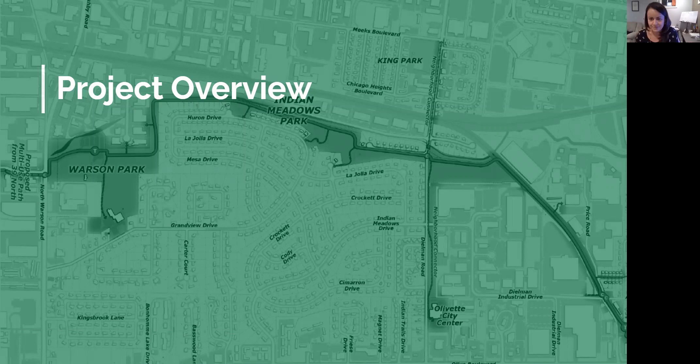Then we divide it into pieces, into segments, and we have the segment planning that started in 2018. Now we are in the segment design and site control. That's where we are right now, scheduled to be completed in this segment of the Greenway by next year, in 2021.

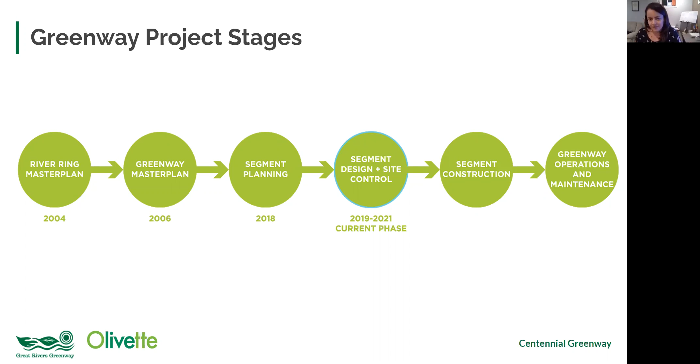After that we do the actual construction, the segment construction. And last, we have the Greenway operations and maintenance, which is when the community enjoys the Greenway, and we have good partners to help us keep up the nice feature we will be building for the community. Next slide please.

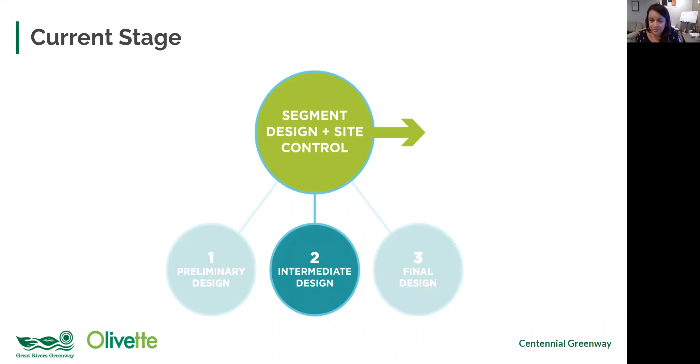So as I said, we are in the segment design and site control. We completed the preliminary design last year. Right now we are in the intermediate design, to be done and completed by January of next year. Then we will be doing the final design, to be done middle of 2021. Next slide please.

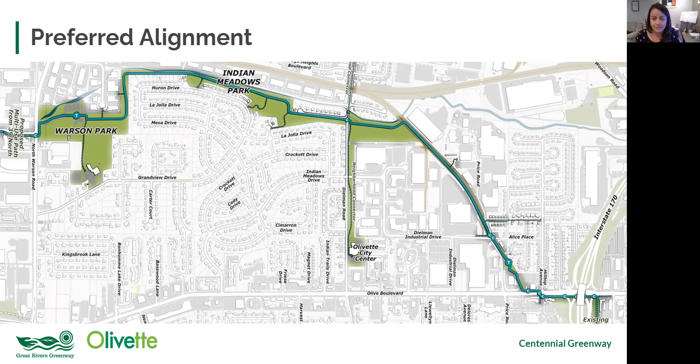So phase 1, we call it 599A—that's our internal project number—is the phase between Warson Road and Dielman Road. Then phase 2 will be the remainder of the segment between Dielman Road and Olive Boulevard. Phase 1 also includes a little portion that you'll see in the next slides, where we incorporate the Olive and 170 intersection.

So concentrating on phase 1, the design of this Greenway between Warson and Dielman Roads, and the little section at the Olive and 170 intersection, is to be complete by the summer of 2021.

Within this phase 1, we have the Warson Park project, which is led by the city at this point. They have their designer, and they are going to team up with GRG to build the Greenway within Warson Park at the same time with the same contractor. So that's part of phase one.

Then there's the Olive and 170 coordination with MODOT, the Department of Transportation. We need to talk to them about the permit to construct the Greenway through that area. It already exists, but we want to enhance the features, especially safety at the crossings there, because of what you'll hear later when Shaughnessy gives an update on community feedback. That's one of the things we need to make safety of most importance, as always.

I wanted to bring this up quickly because I've heard from some residents concerns about the Olive connection and the crossing at Hilltop. Outside of this project, the KIT development project includes the construction of the Greenway connection along the south side of Olive Boulevard, and they are increasing the size and timing of the crossing at Hilltop.

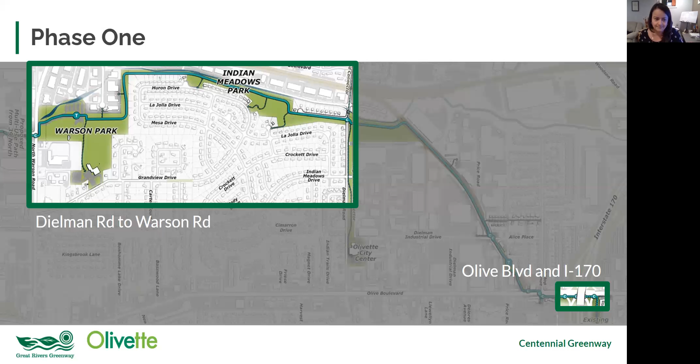Next slide please. So this one is a reminder of the section of phase one that I already mentioned, the project in Warson Park.

This other segment, again in partnership with the City of Olivette and GRG, we together submitted a request for a grant application from the Transportation Alternatives Program, the TAP grant, to cover part of the cost of construction of the Greenway between Warson Park and Dielman Road. We requested one million dollars that will partially cover the construction cost, and we will receive notification from East West Gateway on that award in early 2021.

So hopefully we get that grant, and that can help us with some of the costs to build a nice Greenway here. And at the dead end on Dielman Road, we are coordinating with St. Louis County. They have a project going on right now, also federally funded for Dielman Road, and they are incorporating the Dielman crossing of the Greenway as part of their project.

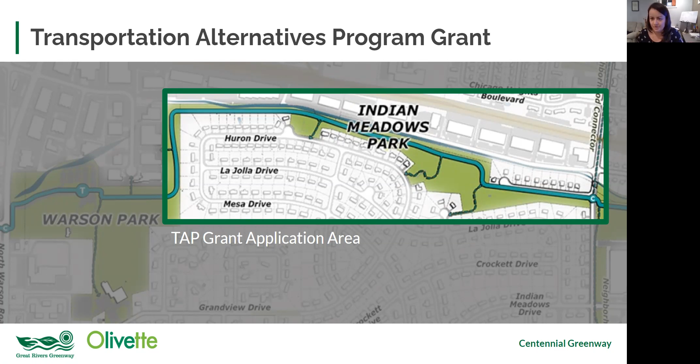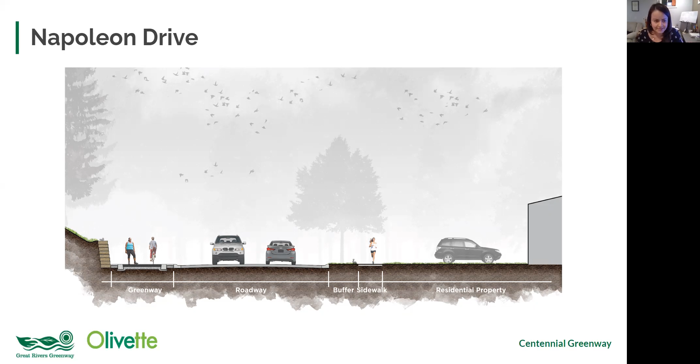So we were talking to the residents about how the construction would go, if they would like to see a privacy fence, landscape buffers, or different types of features dividing and connecting. Some residents really wanted access to the Greenway, and they wanted a gate for direct access. So that was discussed with the residents at that point. We wanted to make sure that we're in agreement with the Greenway here, and that we were listening to what they needed as part of this project. So we have retaining walls, fences, landscape buffers, and a lot of work to be done in this area. It's a challenge, but it's not impossible. So we're planning for it.

Additionally, in this area, MSD was planning to complete a sanitary relief project. They have agreed to move to the other side of the River des Peres. Later on, Bruce is going to update us on that project, but I wanted to mention it was a great benefit to work with MSD and help us not interfere or conflict with their project area. So we were able to have each project have their own project area without conflicts. That was a great accomplishment by the team.

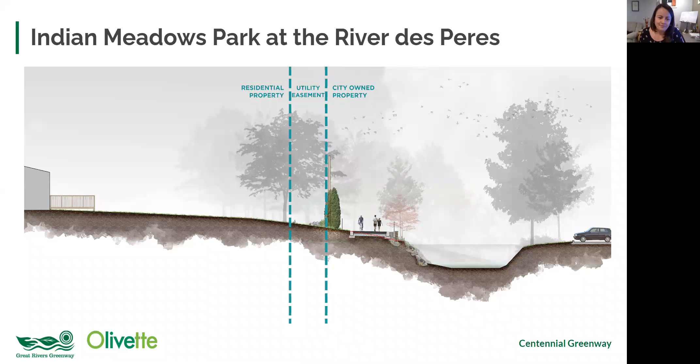Okay, next slide please. So during the intermediate design, we are continuing to work through the details of the design and adding features to make a great Greenway experience in this community. The work is being driven by feedback we have received from you, the community. And with that, I will welcome Shaughnessy Daniels, our Civic Engagement Manager, to give us an update on what we heard from the community on the online survey. Thank you, Angelica, I appreciate it.

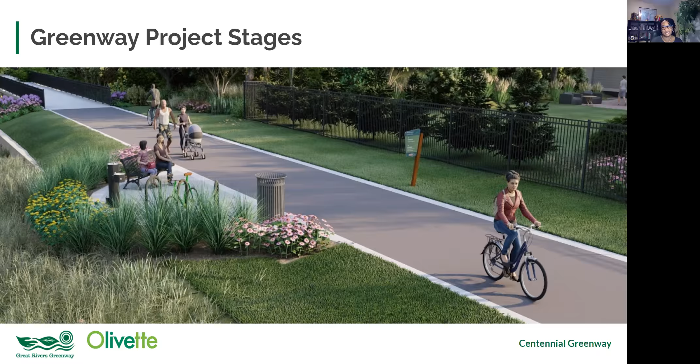I wanted to first, before we go into the actual results of the surveys, talk a little bit about engagement. Engagement is a core principle for Great Rivers Greenway. It's embedded in all of our work, and it's really important to us in terms of our planning and design work for our Greenway projects. We engage early, we engage often, and we engage throughout a project to ensure that the voice of the community is heard and really drives the design for the Greenway project.

So this project in Olivette is no different. We began engagement on the front end of this project. We started in 2018 with the alignment study, where we worked with the community to determine where the Greenway would go. The study was vetted by the community, largely driven by a community advisory committee, and presented to the city council in the spring of 2019. That's how we got to the actual alignment. Now in 2020 and 2021, the engagement is focused on design, so it's your input and ideas that are informing the plans that determine the look and feel for this Greenway. Engagement for this phase launched in June 2020.

We stutter-stepped a little bit because we were in the middle of a pandemic, but we figured out how to get out and have conversations with the community safely. So we started with stakeholder meetings, as Angelica talked about, with the neighbors whose homes are closest to the Greenway alignment. And once those conversations were complete, we provided an update at the July Coffee with the Mayor event.

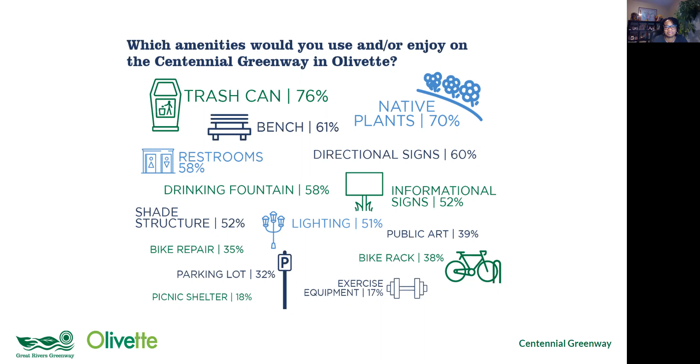We are now going to transition into what it is we're working on, things we're developing, talking about, as Shaughnessy mentioned, some of the feedback we've heard. We had a preliminary design. We're updating, adding detail, taking into account different aspects as we navigate a trail through the community. If you remember back to the overview, a majority of this phase is running through Warson Park and Indian Meadows Park, so we're working to develop alignments that blend into the park through those areas and interface with the park and the residents in a responsible manner. And then the portion along Olive at the I-170 interchange as well.

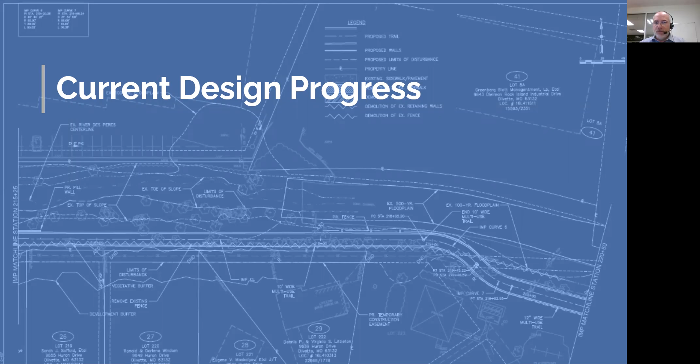So let's talk in a little more detail. As was mentioned, we're in the intermediate, I'll call it 70% design phase. We started with the conceptual study - where should the alignment go. That transitioned into a preliminary design called the 30% - detailing out where it could go. Now we're just adding more detail: how's the drainage, reviewing the proposed design against existing drainage patterns, the slopes of the ground, the roadways we're interfacing with, like Dealman Road and Olive Boulevard. Those are very important, along with park features, to really develop an idea of what the profile should look like - responsibly taking care of drainage, connectivity, and keeping the grades of the trail at walkable, comfortable slopes.

And then the other piece that we're doing, as mentioned, work along River des Peres behind the Huron properties - that's a kind of delicate area, a narrow footprint right next to a creek. We're coordinating with the Corps of Engineers on that one.

Dealman Road - coordinating with St. Louis County Highway Department, who operates and maintains Dealman Road. I-170 - coordinating with MoDOT. The MSD project was mentioned, so there are various other stakeholders that this trail will interface with, and we're taking this time to really add detail to the design and coordinate with those other agencies as the project interfaces with them. And then, all along, goes without saying, coordinating with the city of Olivette and Beverly as we're navigating a trail through the parks.

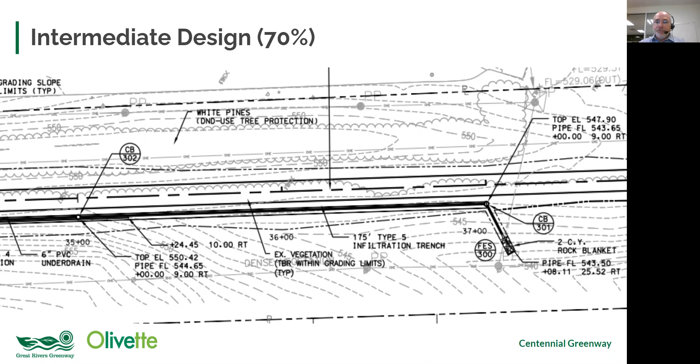There will be plantings and whatnot, or existing trees that we're constructing along. But generally just making sure that the trail blends in with the existing terrain, slopes into a ditch where we can drain the water responsibly, prevent ponding, etc.

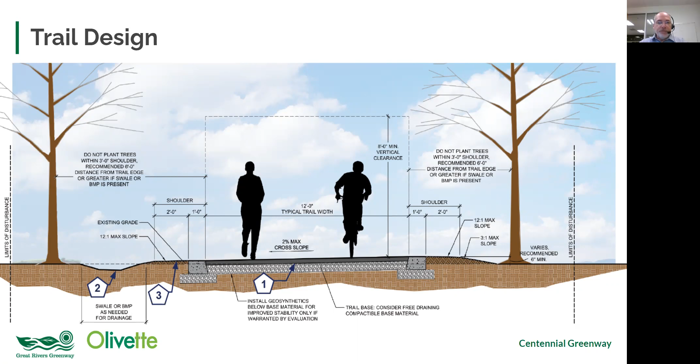The trail itself is intended to be 12 foot wide as a typical dimension of asphalt surface. On either side of that would be a 1 foot wide concrete curb. So this is an upgrade from other portions of the GRG's network that have been built to a previous standard. Overall width of the paved surface will be 14 foot, with a 2 foot wide shoulder area, flat area adjacent to that, generally speaking.

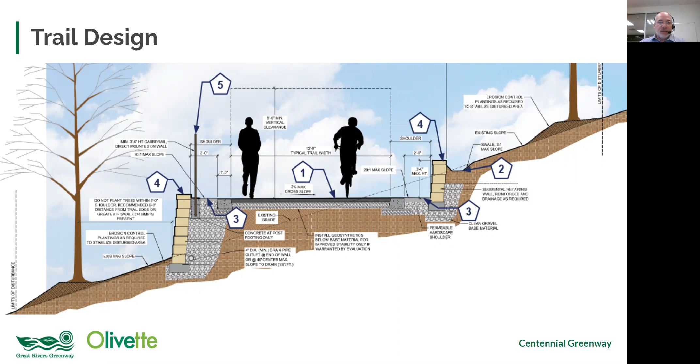Okay, let's go to the next slide. Safety was mentioned before, definitely an important topic. We have coordinated and are continuing to coordinate with St. Louis County, who operates and maintains Dealman Road. As was mentioned, St. Louis County does have a Dealman Road project they intend to construct next year, where they're going to resurface the pavement along Dealman Road and upgrade the sidewalks and curb ramps at the intersections.

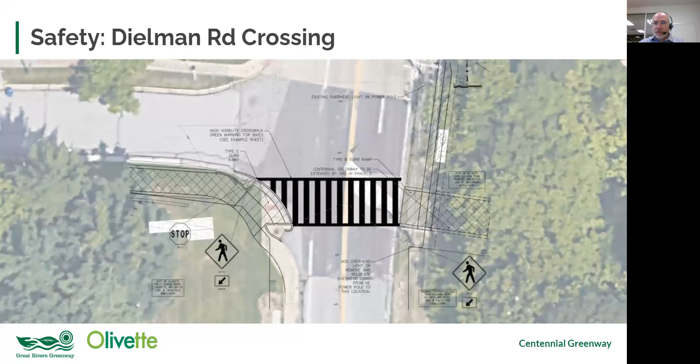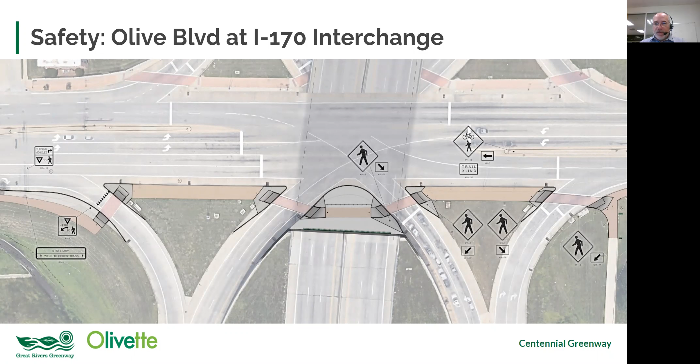Let's go ahead and go to the next slide. So this is a little bit more detail to what was presented previously.

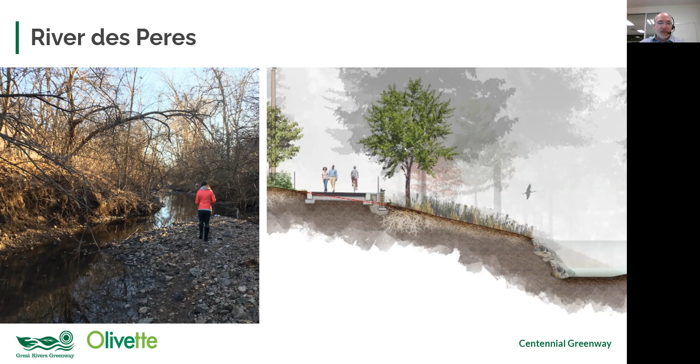So looking to restabilize some of the bank along this trail and establish bank stabilizing vegetation, short and tall, in this area. This ultimately would be shaded, but some of the existing trees would need to be removed as part of this construction, though they would all be replanted.

And at that, I will turn it over to Matt to talk about some additional aspects of the project.

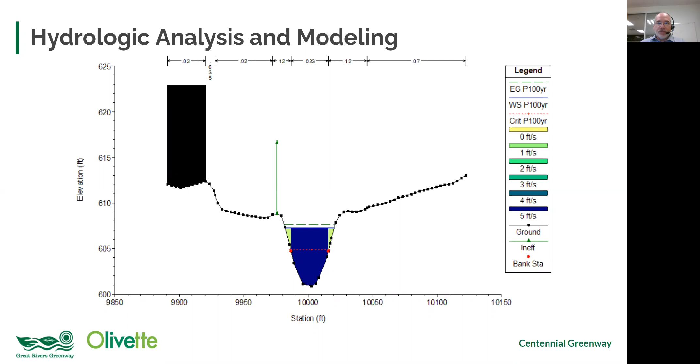The stabilization and restoration of the River des Peres is a great segue into talking about the overall landscape approach to the Greenway. The survey feedback we received at the preliminary design stage was very clear that shade and trees are critical components to a pleasant Greenway experience. The following slides illustrate how the design responds to that feedback.

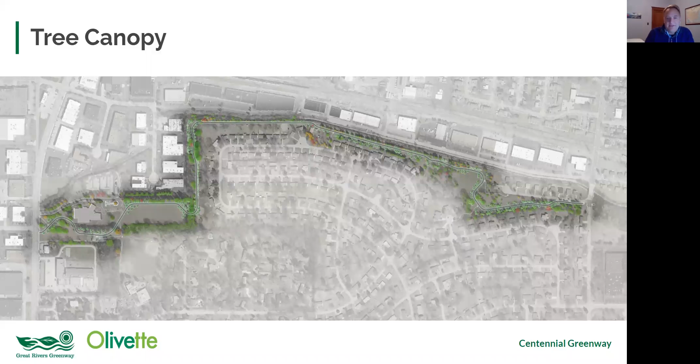On this diagram, you can see that new tree plantings are integral to the design of the Greenway. The proposed trees to be planted here are shown outlined in white on the drawings.

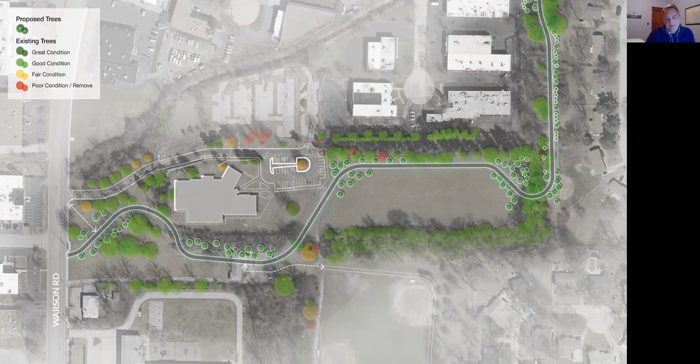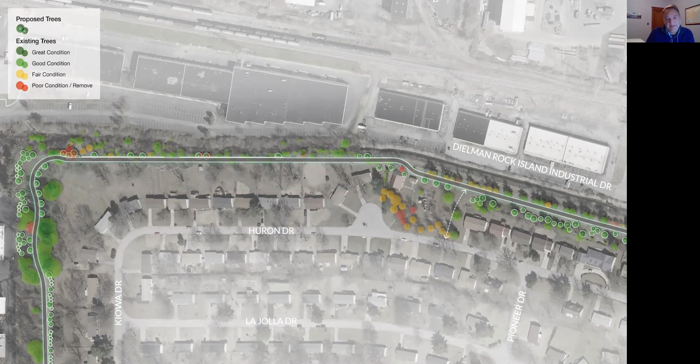New tree plantings are placed with the intent of complementing the existing tree canopy. In some cases we're filling in gaps or providing screening for neighbors, or occasionally replacing existing trees being displaced by the Greenway's construction, as Will was pointing out.

Those existing trees are also highlighted on these pages. They've been color-coded according to their condition and desirability. The landscape architectural team has assessed these trees, and the City of Olivette has also commissioned an arborist study in these two parts, so we've got some good data on these trees. Most of the trees in these areas are in good shape and should be protected where possible.

Those are the ones shown in green without the white outline. Trees in poor condition can present a hazard to users and should be removed as part of the project, shown in red. Some trees are somewhere in between; they may require extra protection, extra watering, or other treatment in order to be preserved, and those are shown in yellow.

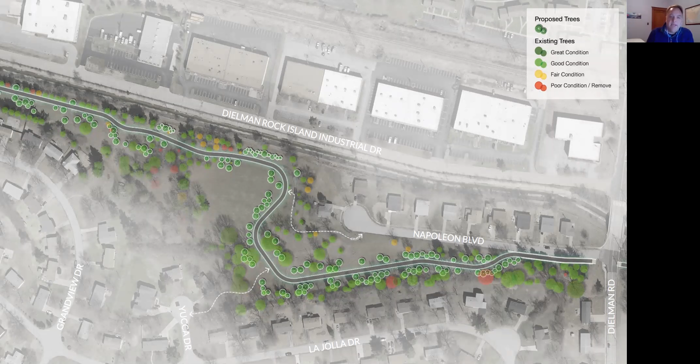Here's a closer look at an example of how existing trees are guiding the placement of the trail. On the right side of the page, there's a grouping of trees in poorer condition shown in red, which will be removed to make way for the trail.

But moving to the left, you can see that we are shifting the trail alignment by a few feet in hopes of avoiding the root zones of some beautiful trees on the west end of Warson Park. In some cases, retaining walls or other structures may be required in order to preserve these valuable trees.

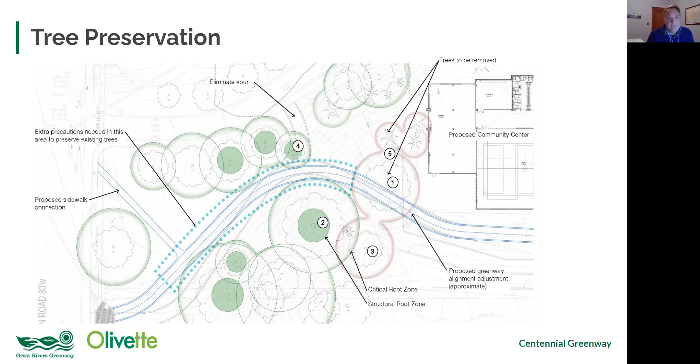These plans are informed by lots of in-person field visits, going out, photographing, and seeing this area in context, which helps us imagine and visualize what the Greenway will look like when it's installed. The aqua line shown there demonstrates how we are weaving in and out of these existing trees.

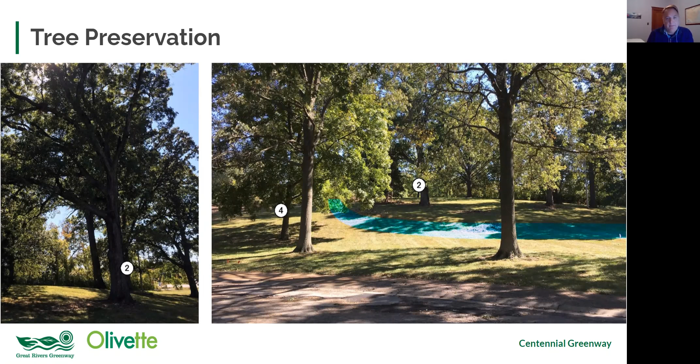Trees are one aspect of the landscape, but we also heard from survey responses that access to nature in general is a big part of the Greenway experience. The diagrams in the following pages focus on landscape communities, particularly the kinds of plant communities representative of this region of Missouri.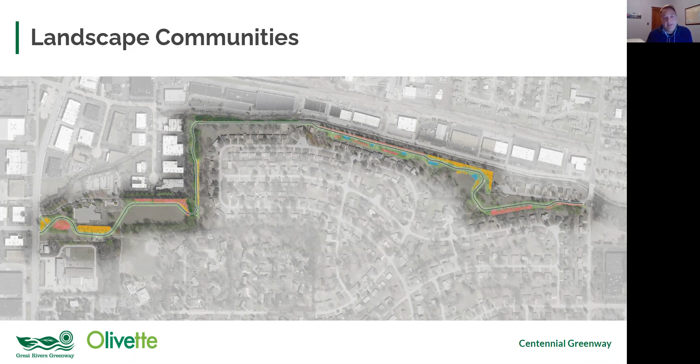We're leaning heavily on native plants, but selecting individual species based on their appropriateness within the parks and adjacent to the Greenway. That means we're thinking about things like long-term care and plant height relative to visibility, which affects one's perception of safety in the space.

These drawings are simplified diagrams, but they show how various plant communities have been selected according to local site conditions. Areas with existing trees may be underplanted with savanna species, while more open, sunny areas receive meadow or short prairie grasses and wildflowers.

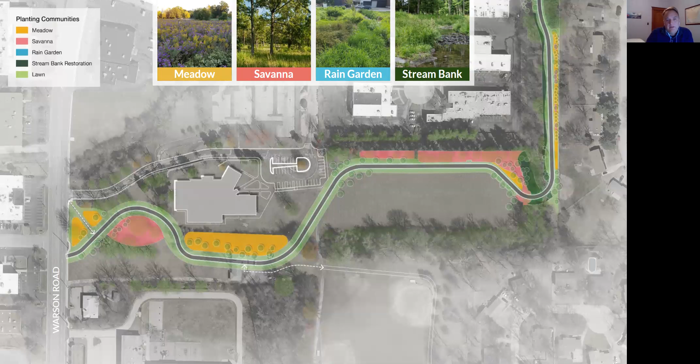Along the River des Peres, we'll be looking to plant species with robust root systems adapted to hold the stream bank in place and prevent erosion, as Will was speaking about previously.

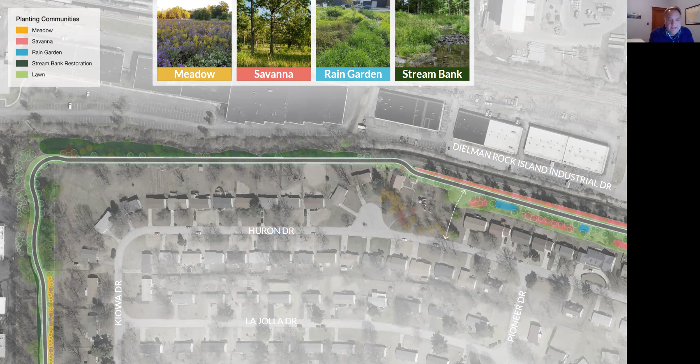And in low-lying areas prone to drainage issues, we'll be designing rain gardens to help capture and infiltrate stormwater runoff.

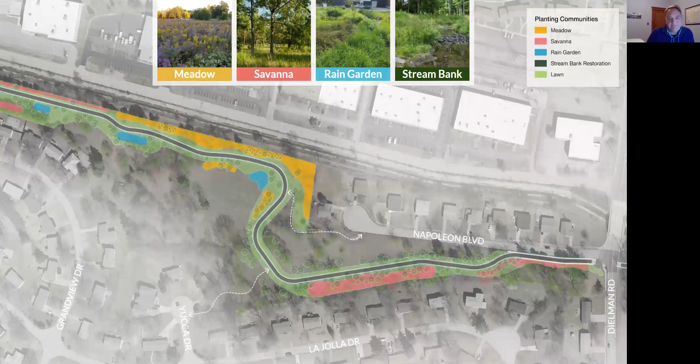In addition to the natural elements of the Greenway, survey feedback also pointed out the importance of clear markings and signage along the Greenway. Great Rivers Greenway is implementing new signage standards across its network, and the suite of signs includes identity signage, wayfinding, interpretive, and even emergency locator information. During this phase, we'll be locating these signs along the Greenway according to GRG's guidance.

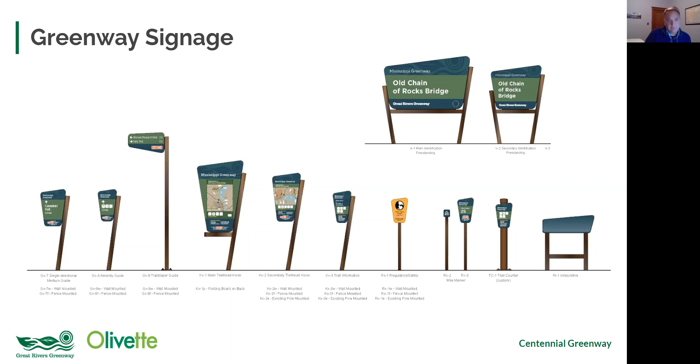These signs may help direct users to other amenities in the Greenway. The maps on the following pages show the proposed locations of many of the features called out by the survey feedback. Drinking fountains, restrooms, benches, and so on are very popular requests.

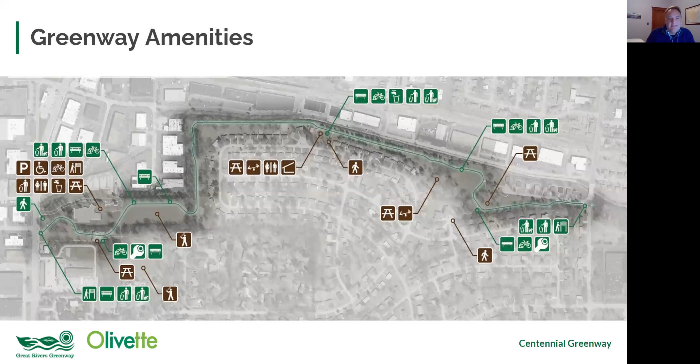Because this segment of the Greenway is primarily located within two of Olivette's parks, these features complement and support the mission of the parks, and vice versa. The icons on these pages are color-coded to depict the elements to be constructed as part of the Greenway, as well as those which are part of the parks.

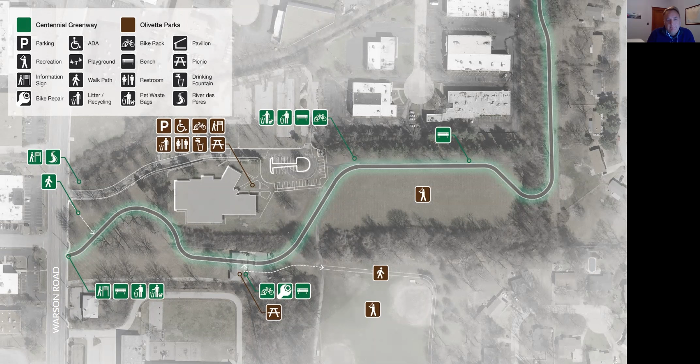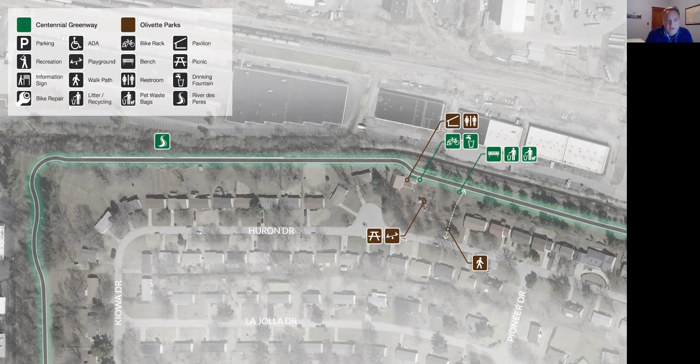Indian Meadows Park is a good example of how the park and the Greenway amenities will complement one another. Bike racks and a drinking fountain are planned to support the existing restrooms and pavilion, while additional seating and litter receptacles will be useful for Greenway users visiting the playground.

As we're designing and locating these proposed features, we are of course considering how they will fit within the parks as they exist today, but also with an eye to the future and the improvements envisioned by the Olivette Parks Master Plan. And with more on that, here's Beverly Tucker-Knight.

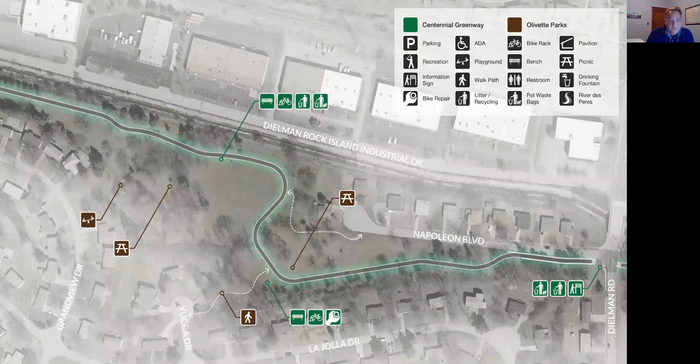Thank you, Matt, and hello everyone. Beverly Tucker-Knight, Parks and Recreation Director for the City of Olivette. The city is very excited about the Greenway.

One, because we know it's something that our residents truly desire, and we had wonderful feedback from residents coming through the planning part of it. But also the Great Rivers Greenway Centennial Greenway dovetails perfectly with our Parks Master Plan.

The city's Parks Master Plan was adopted in 2018, and we are now in the process of implementing it following the passage of Prop C. We are very excited because the timing of this coincides with us doing the redevelopment of all of our parks and building our new community center.

So it's allowing us to ensure that as the planning of the Greenway comes through our parks, it's also seamlessly connecting with the renovations we're doing at the same time. And the mission and concepts in our park master plan are closely mirrored by the same core tenets of Great Rivers Greenway, so that really is a win-win for us.

One of the goals of the park master plan was to reopen and reconnect the lost connection between Warson Park and Indian Meadows Park, and the Greenway is basically doing that for us. So it's wonderful because it helps us achieve some of the goals of our master plan without us necessarily having to spend money on it too.

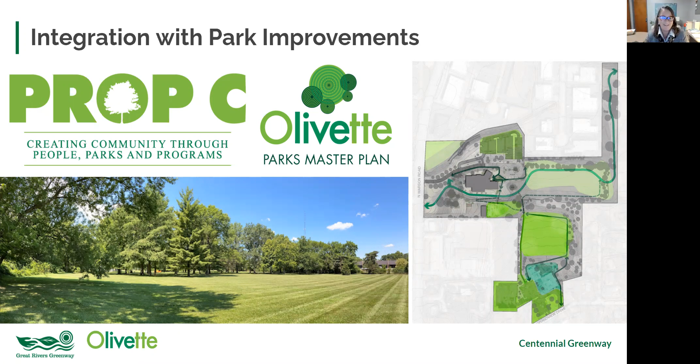Thanks, Beverly. Bruce McGregory here, Olivette Public Works Director. Many of you probably are aware of the Metropolitan Sewer District sanitary relief projects. They've been naming them Project Clear. There's currently one beginning over at I-170 just south of Olive, going to be working towards Stacy Park along an existing creek there.

About middle of the community engagement process to determine the alignment, we were approached by MSD stating that they were going to do another project on the north side of Olivette, beginning in North Price in the industrial park, working over to Overlands, as shown going through the Indian Meadows map. As you can imagine, this was sort of a surprise to us, and we said, well, this is great, but we will have a brand new trail. The MSD project would align about 18 months behind the Centennial Greenway construction, and would be right on top of the trail, would cause a lot of interference.

We worked with their design team for quite a while, and were able to come up with an alternate alignment. We can go to the next slide.

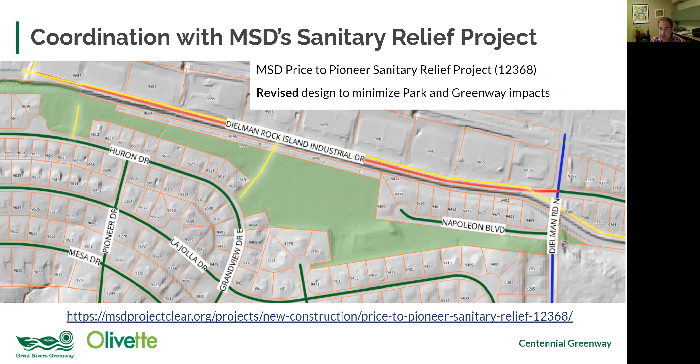And now the majority of the route is going down Dielman Rock Island, with only a couple segments that are going to intersect the trail area. We are working with them again so that they can advance construct those segments that intersect with the Greenway, so that we'll have minimal interference with the existing trail or the new trail, and additionally with our new park improvements. And happy to answer any questions via email if anybody has them.

Thanks, Bruce. Thanks, everybody. Okay, so this is almost the last item on the agenda, next steps. This is what our schedule looks like for the upcoming years. As I mentioned before, the intermediate design, which we are at right now, will be completed in the spring of 2021. Final design, summer of 2021.

This process takes time, right? As you can see, we have a solid team of professionals working to make sure that we produce a very high quality Greenway for the city of Olivette. So the final design in summer of 2021 will bring that result.

And that will be, there will be an opportunity to do the bidding in the fall of 2021. And with the construction being ready for, immediately after, and begin in the spring of 2022. Construction timeframes vary, depending on how complicated things might be with the slope stabilization and the construction of retaining walls and things like that, and the weather. So we typically give a 12-month period, but it can be shorter than that. So our completion for phase 1 of the Centennial Greenway would be early 2023.